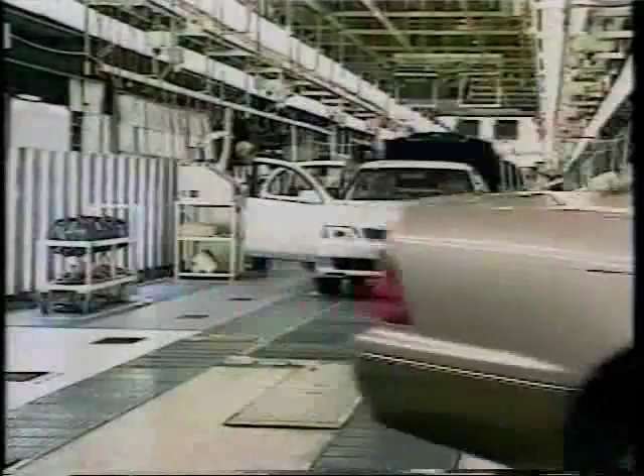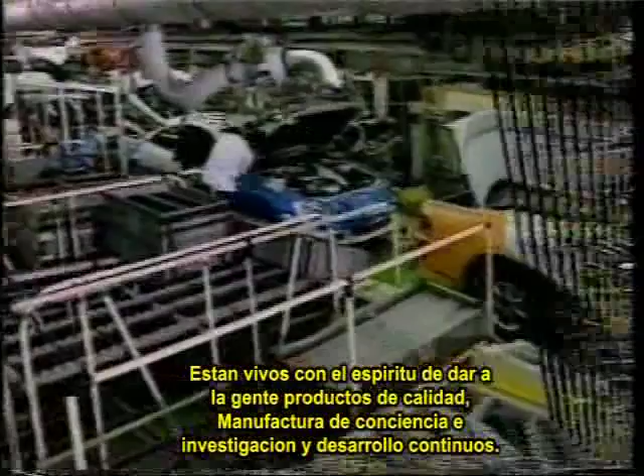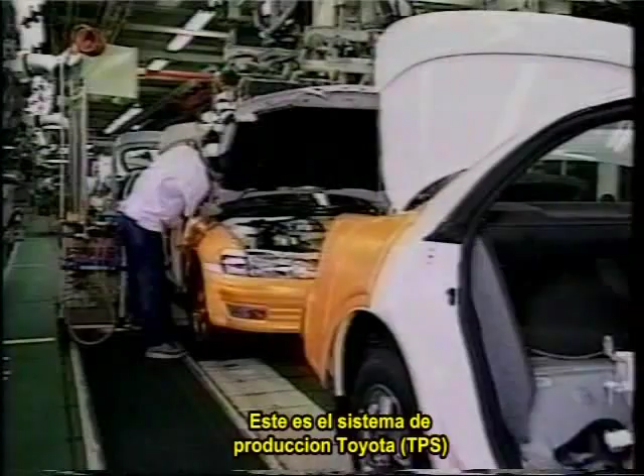Consistently crafted cars roll off the assembly line in a smooth flow. They are alive with the spirit of providing people with quality products through conscientious manufacturing and continuing research and development. This is the Toyota Production System, where manufacturers eliminate waste to provide customers with well-made products in a timely manner.

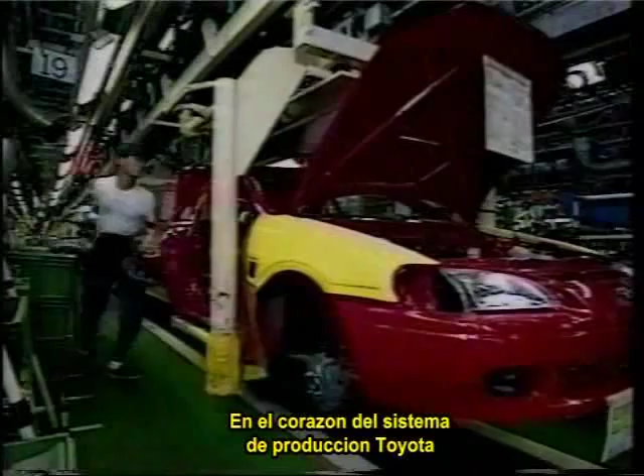At the heart of the Toyota Production System are the concepts of intelligent automation and just-in-time manufacturing. Let's explore the history of that system, which has transformed manufacturing around the world. The concept of intelligent automation, called jidoka, originated in looms invented by Sakichi Toyoda, the founder of the Toyota Group.

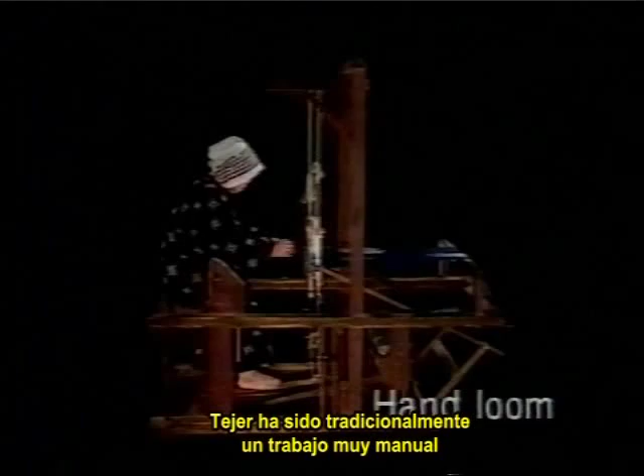Weaving traditionally had been a very manual kind of work. The weaver fed the horizontal yarn back and forth between the vertical yarns. Sakichi had watched his mother working at a manual loom and thought of ways to make weaving easier.

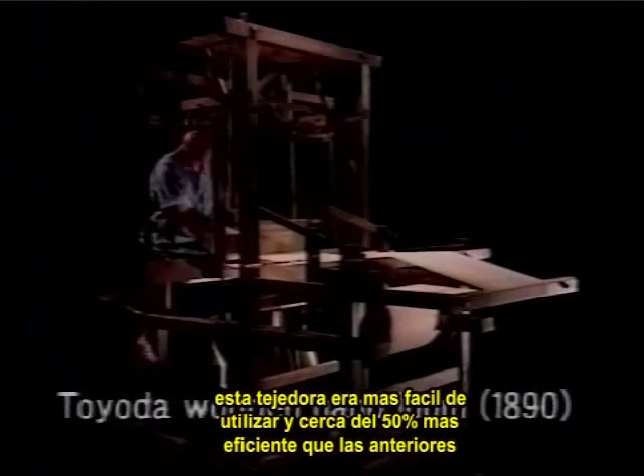He invented an original wooden hand loom in 1890. His loom was easy to use and nearly 50% more efficient than previous looms. The operator could move the yarn guide back and forth with one hand and feed in the horizontal yarn simultaneously. Sakichi then went to work on power looms. In 1896, he created Japan's first power loom, and he continued making one improvement after another.

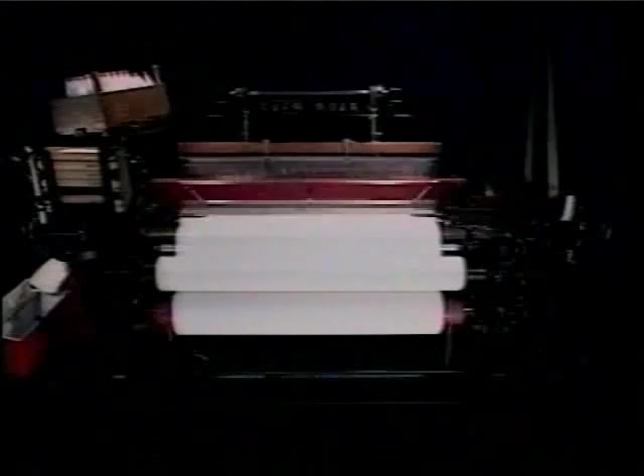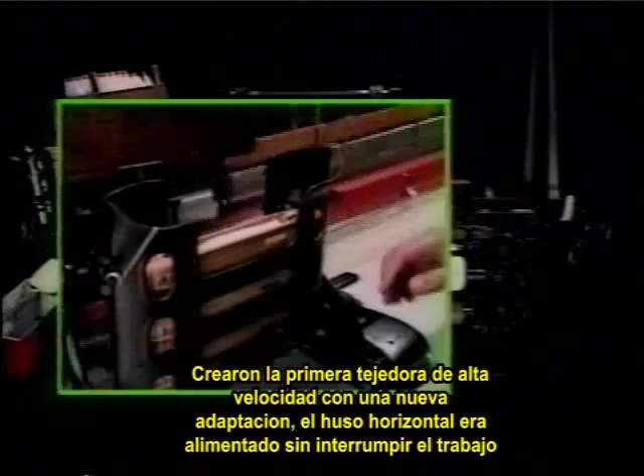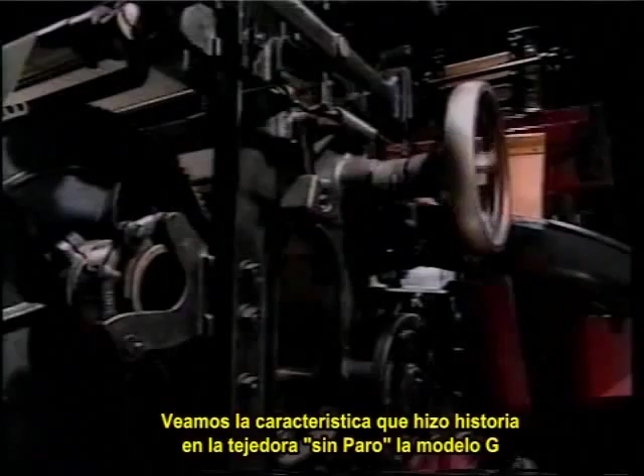In 1924, Sakichi and his son Kiichiro achieved a historic breakthrough. They created the world's first high-speed loom that fed in new weft, the horizontal yarn, reliably without interrupting work. Let's take a look at a feature of their breakthrough non-stop loom, the Model G. Traditional looms wasted material on fabric like this when one of the vertical warp yarns snapped, as often happens.

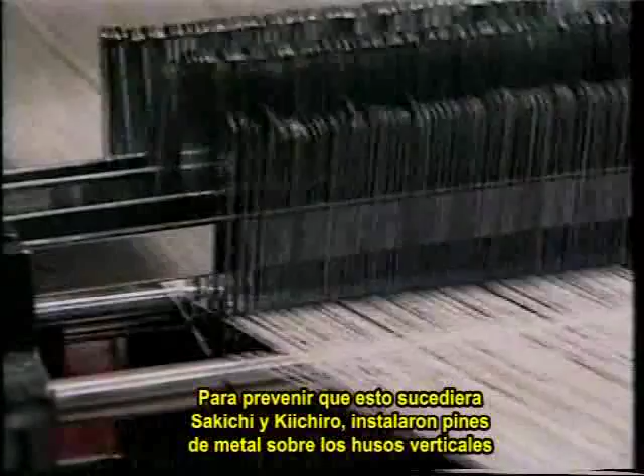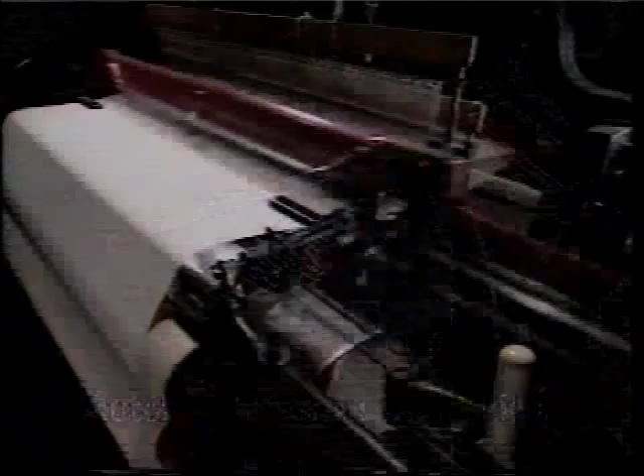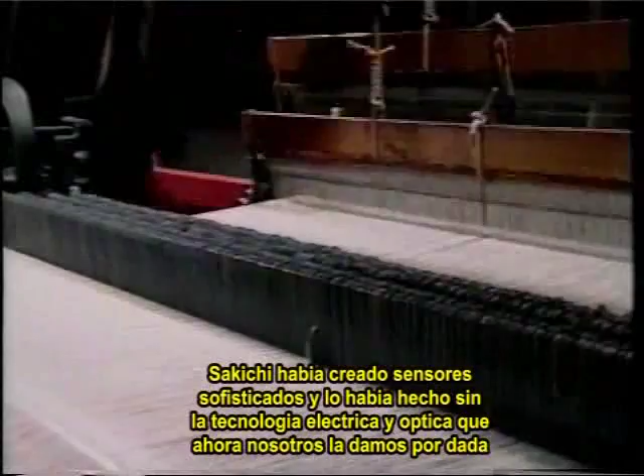To prevent that waste, Sakichi and Kiichiro arranged thin metal floaters over the vertical yarns. A floater would slip down and stop the loom if its yarn snapped. These automatic stop innovations for preventing waste were absolutely remarkable. Sakichi had created sophisticated sensors, and he had done that without the benefit of the electrical and optical technology we now take for granted.

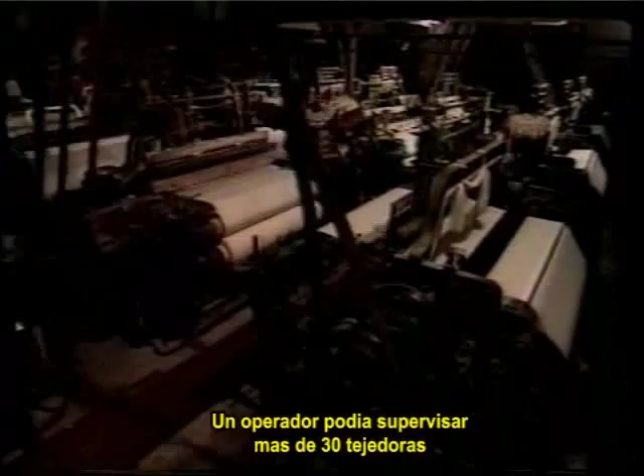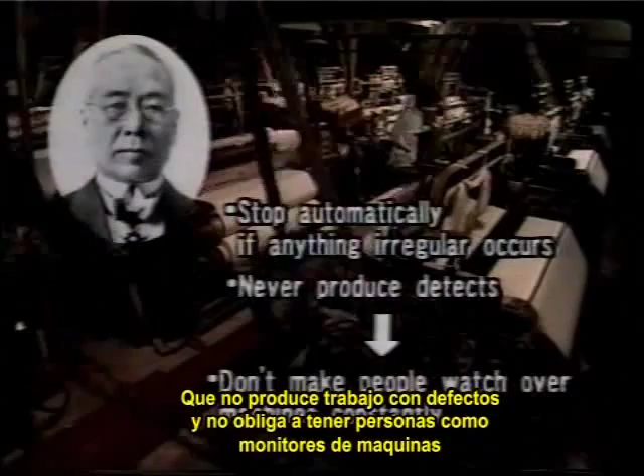His innovations eliminated the need for an operator to watch over each loom continuously. One operator could oversee more than 30 looms. The Model G captured a great deal of attention in Europe and the United States. So Sakichi's advances resulted in machines that would stop automatically if problems occurred, that would not produce defective work, and did not oblige people to serve as monitors.

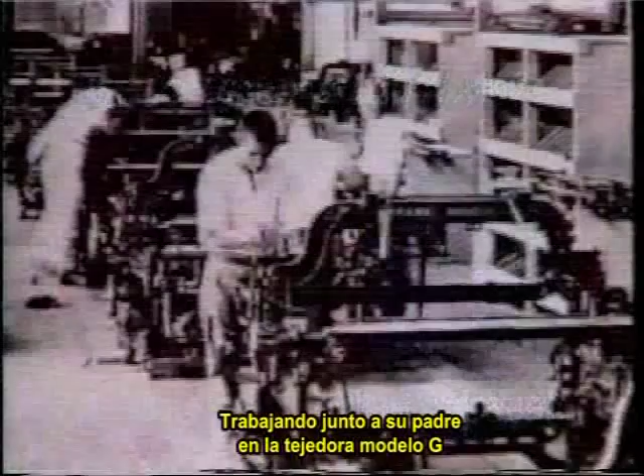The other core concept in the Toyota Production System is just-in-time manufacturing. This concept originated in the ideas of Sakichi's son Kiichiro, who led Toyota into automobile manufacturing. Along with working with his father on the Model G loom, Kiichiro helped put in place a mass production system. He established Toyota Automatic Loom Works in 1926 and introduced American assembly line methods to produce the Model G loom.

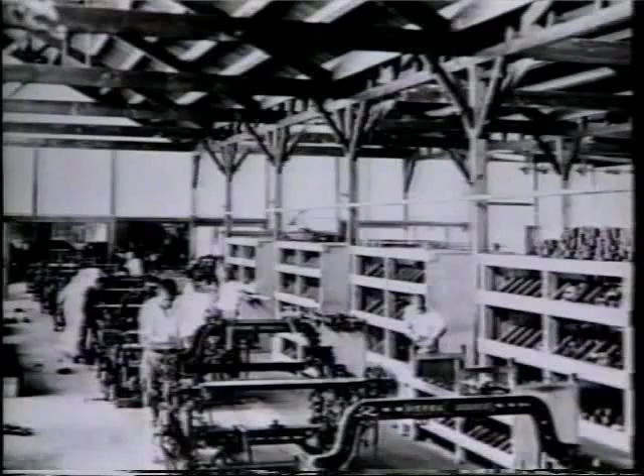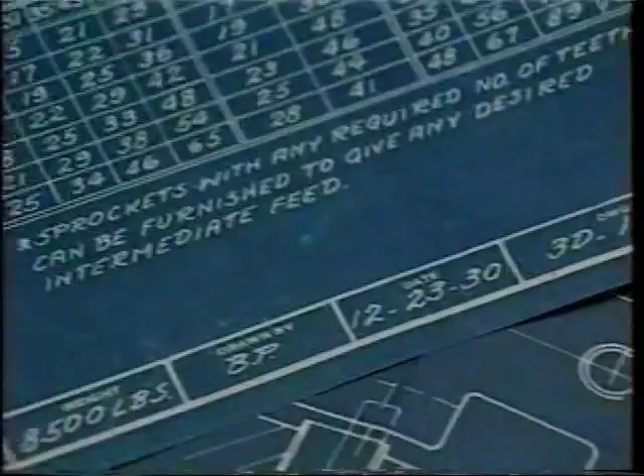Kiichiro traveled to Europe and North America in 1929 to find licensees for his company's automatic loom technology. He was amazed at all the vehicles and roads in the United States and he resolved to begin developing automobiles. People tried to dissuade Kiichiro. They said that Japan didn't have either the technology or the economic foundation for a viable car industry. But he ignored their doubts and set up a shop in a loom factory to develop small engines. He undertook the risk of investing in expensive precision equipment.

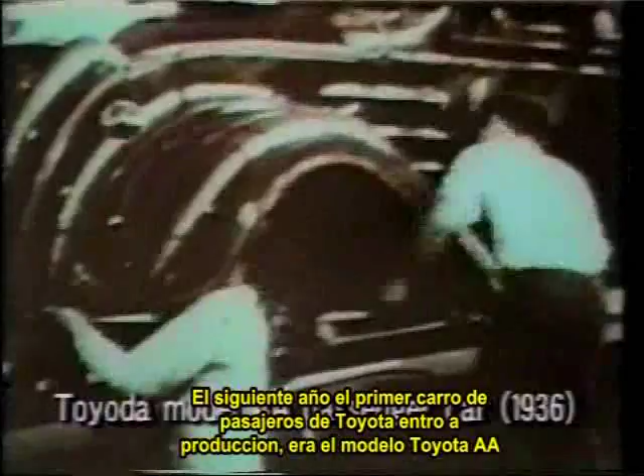In 1935, his team created a passenger car prototype, the Toyota Model A1. In the following year, the first Toyota passenger car went into production as the Toyota Model AA. Kiichiro incorporated his automobile operations in 1937 and began work on a vehicle plant. He refined American mass production methods for his plant and developed the beginnings of just-in-time manufacturing.

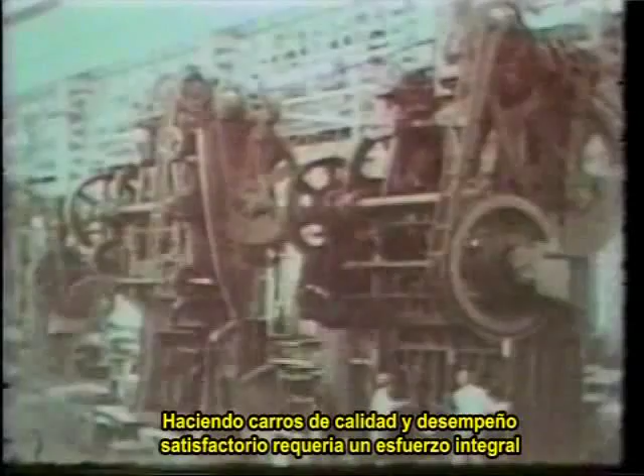The idea was to eliminate waste by making only what was needed, only when it was needed, and only in the amount needed. Making quality cars of satisfactory performance required an all-out effort. And Kiichiro was moving to refine just-in-time manufacturing further, but the outbreak of World War II in 1941 interrupted his efforts.

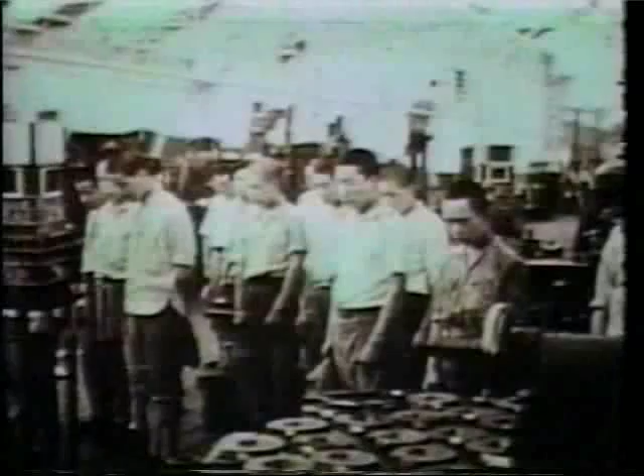After the war, Kiichiro passed on his dream to his cousin Eiji. He instructed Eiji to bring the company up to U.S. standards of technology within 3 years. That was a daunting task.

U.S. productivity in automobile manufacturing was 8 times higher than Japan's, and Toyota was short of equipment and capital. So raising productivity was a pressing issue. Eiji assigned a machine shop manager by the name of Taiichi Ohno to develop a more efficient production system.

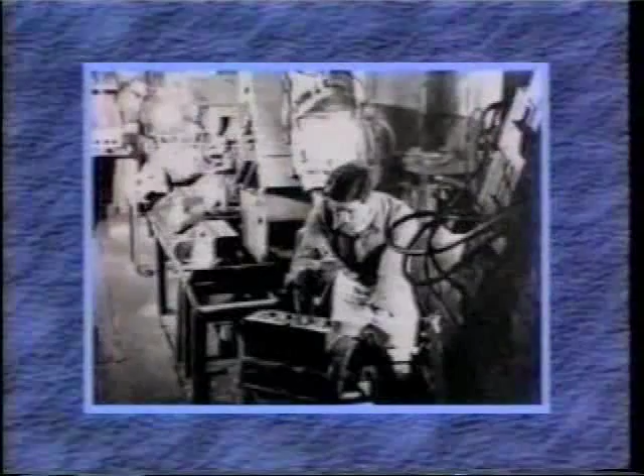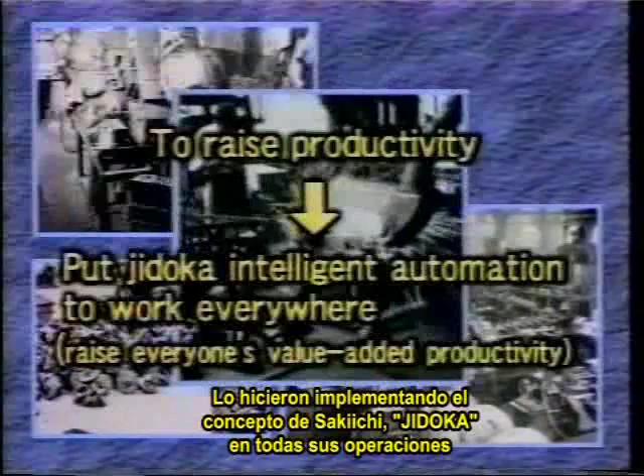The two men looked for ways to raise the value-added productivity of every worker. They did that by putting Sakichi's Jidoka concept to work throughout their operations. They also looked for other ways to stretch their limited resources of equipment and capital. They did that by putting Kiichiro's just-in-time concept to work systematically.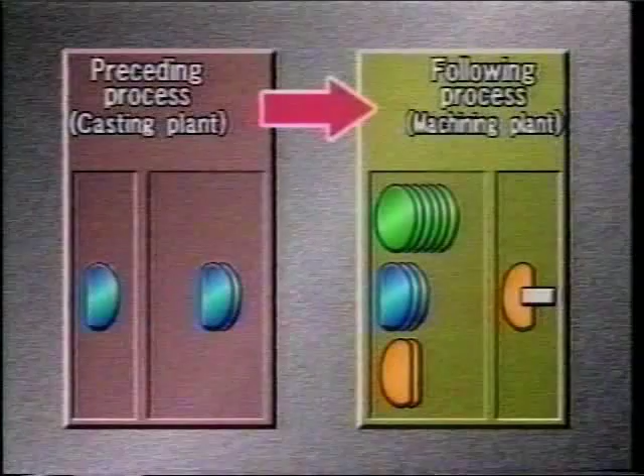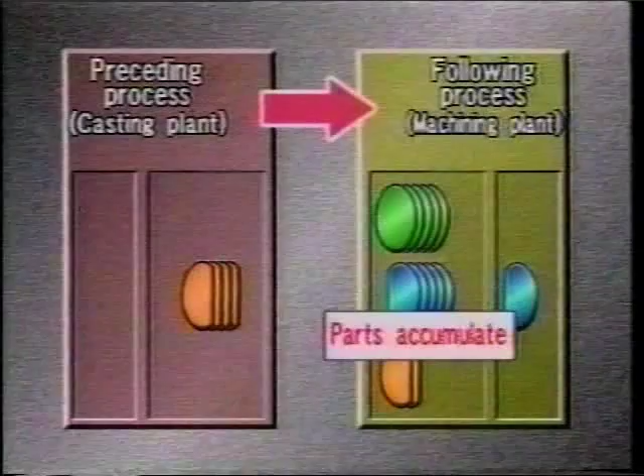Ohno took a cue from the U.S. supermarket. He made each process the customer for the preceding process. In traditional manufacturing, processes delivered parts to the following processes regardless of what was actually needed. Ohno devised a completely new kind of system.

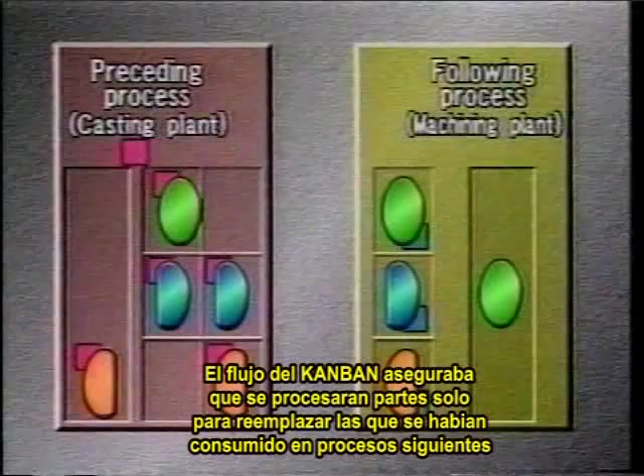Processes used Kanban cards removed from parts they had consumed to withdraw parts from the preceding processes. Kanban on the parts arrayed by processes came off when the following processes withdrew the parts. They became instructions to make additional parts. The Kanban flow ensured that processes made parts only to replace parts actually consumed by the following processes.

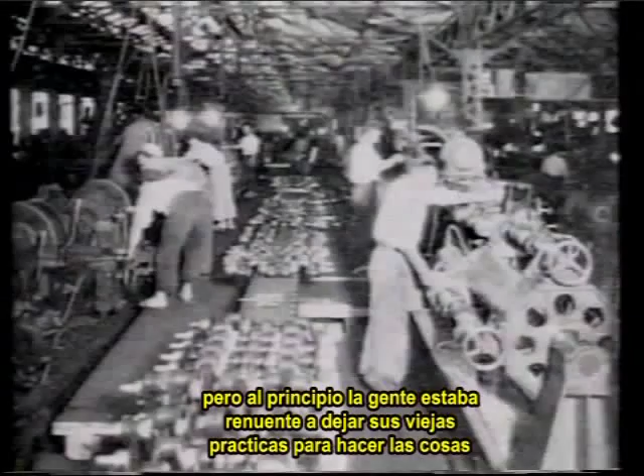Active cooperation by the people in the workplace would be essential to Ohno's system. But at first, people were reluctant to give up their old ways of doing things. Ohno took the initiative. He went into the workplace and taught people how to use his system. Eiji Toyota supported Ohno enthusiastically in putting the new production system in place.

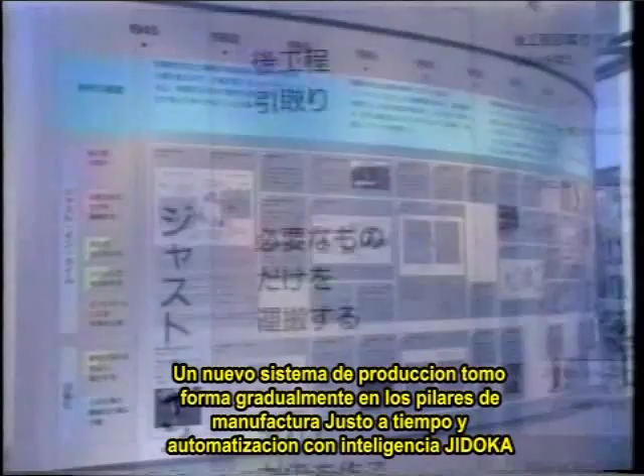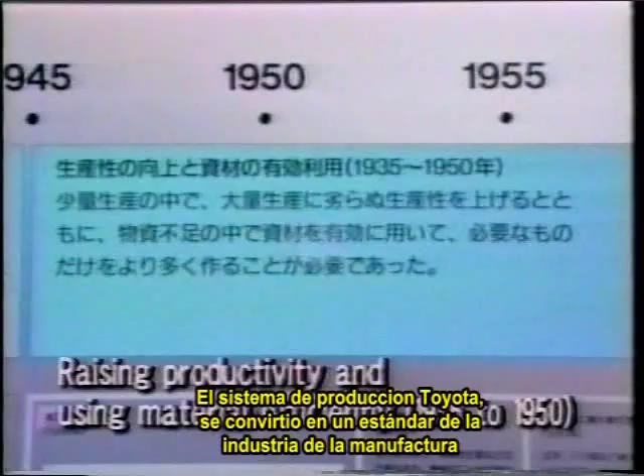A new production system gradually took shape on the foundation of just-in-time manufacturing and Jidoka intelligent automation. As the Toyota production system, it became a standard for manufacturing industries. The Toyota production system gained global attention after the oil crisis of 1973. Toyota recovered more quickly than other automakers from the crisis, and its production system received much of the credit for that resilience.

General Motors Corporation approached Toyota about setting up a joint venture to make small cars in the United States. The two companies set up New United Motor Manufacturing Incorporated in California in 1984. Differences in language and culture presented big challenges, but the spirit of making things well knows no borders. People accepted the Toyota production system, and the Toyota-GM joint venture became the highest-ranked automobile plant in the United States for quality. It became a symbol of successful industrial cooperation between Japan and the United States.

A book published by the Massachusetts Institute of Technology hailed the Toyota production system as the machine that changed the world. Today, the Toyota production system has gained a worldwide following. Let's see how the system now operates in the world's most modern automobile plants.

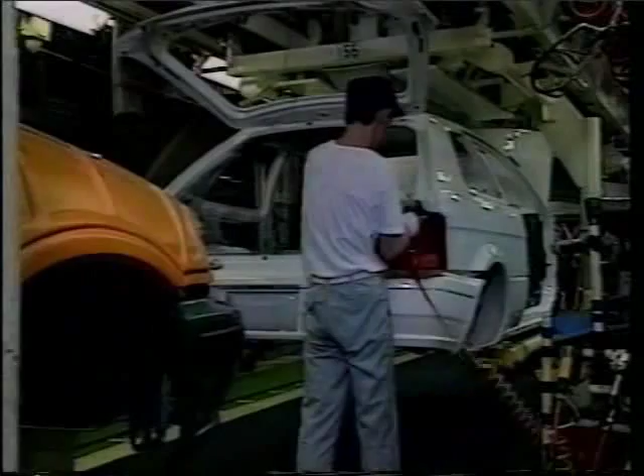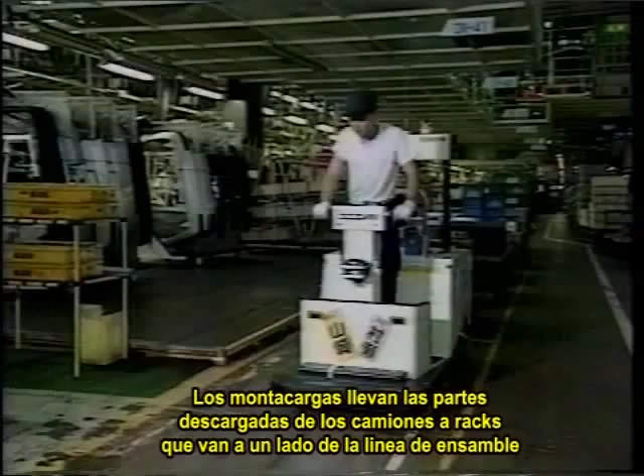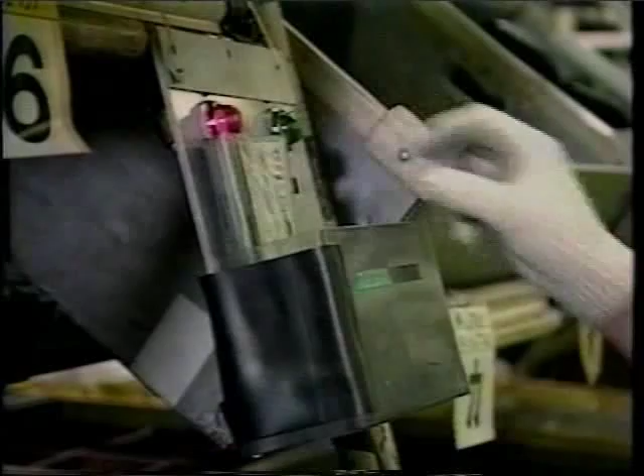The trucks that deliver parts to the plants carry a variety of items in each load. That allows each truck to travel fully loaded, which minimizes trips and thus reduces traffic congestion. Forklifts carry the parts unloaded from the delivery trucks to racks alongside the assembly lines. When people on the assembly line use the parts, they remove the attached Kanban cards. The Kanban get picked up regularly and sorted. The delivery truck drivers pick up the Kanban for their companies before leaving.

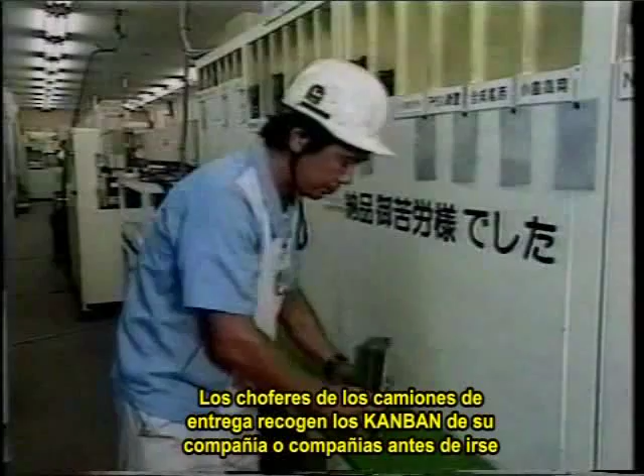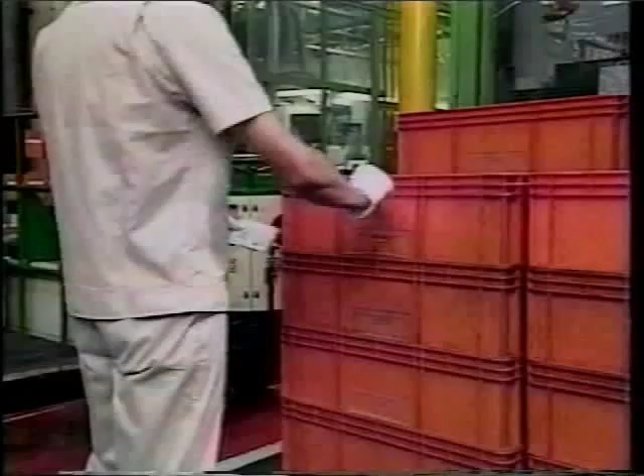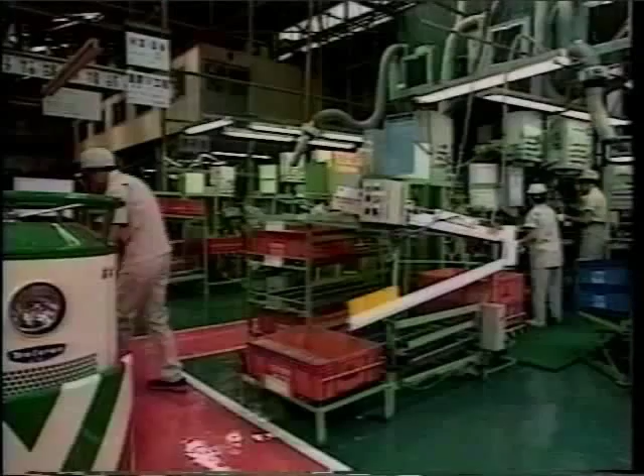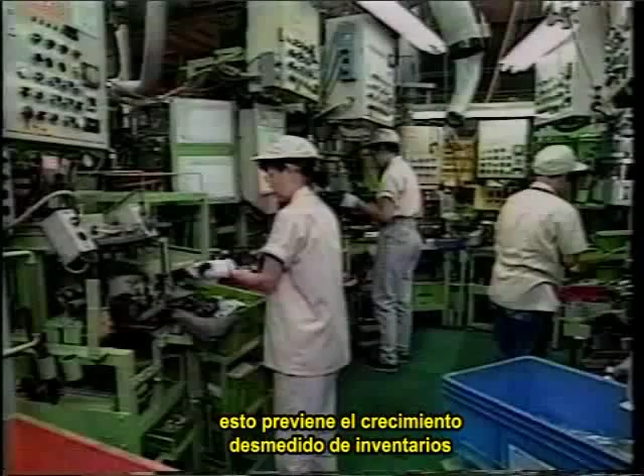Back at the supplier's plant, the Kanban become orders for withdrawing additional parts. Sorting arranges the Kanban according to area in the plant. Shipping personnel exchange the Kanban and empty boxes for full boxes. The production processes in the plant make additional parts only to replace parts that have been withdrawn. That prevents the wasteful buildup of inventories. When the shipping personnel have gathered a full truckload of parts, a truck carries the parts to the vehicle plant.

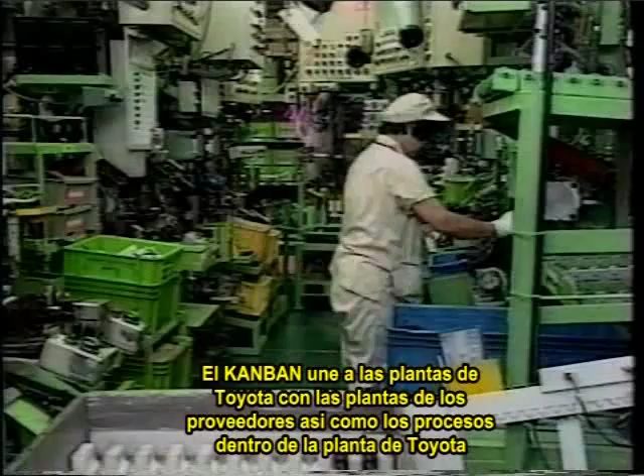Kanban thus link Toyota plants with suppliers' plants, as well as linking the processes inside the Toyota plants. Just-in-time manufacturing minimizes inventories, eliminates waste, and maximizes productivity at all the plants that participate in the Toyota production system. Jidoka intelligent automation also continues to play a big role in the system.

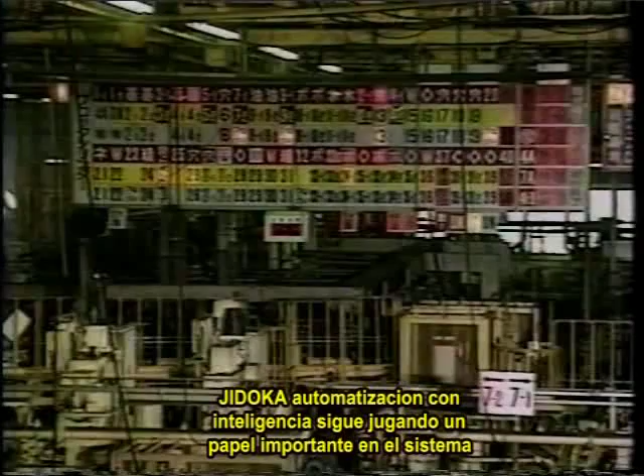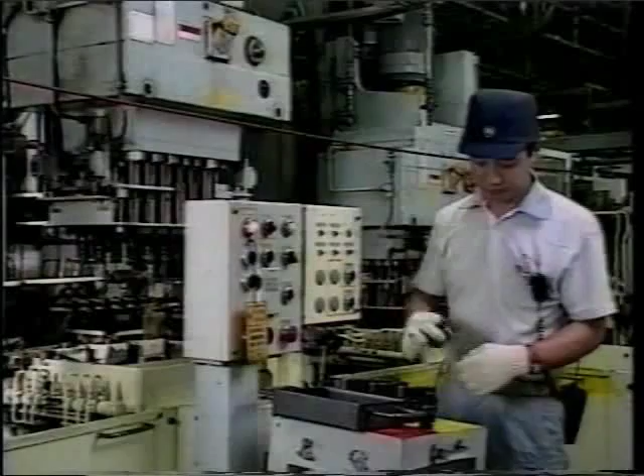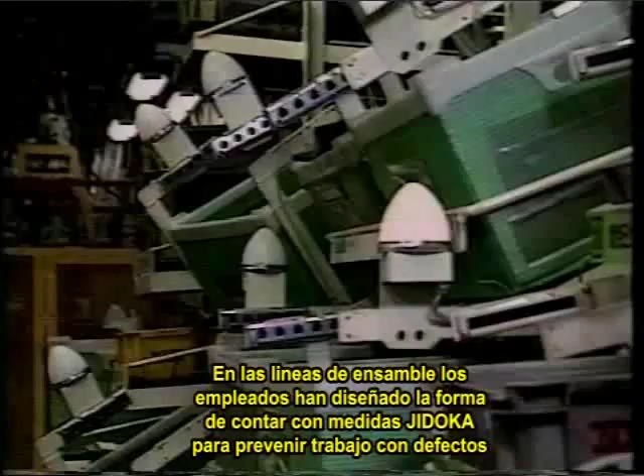On automated machining lines, numbered lamps light up to call attention immediately to any problems detected by sensors. On assembly lines, the employees themselves have devised countless Jidoka measures to prevent defective work, so Sakichi's concept continues to prevent waste. The idea is to build quality assurance into every process, and it works.

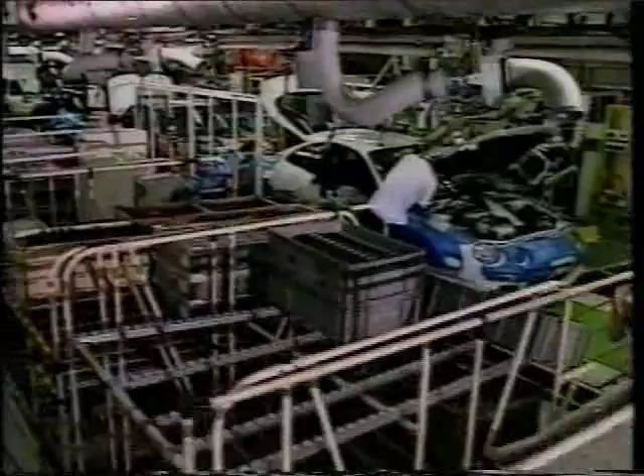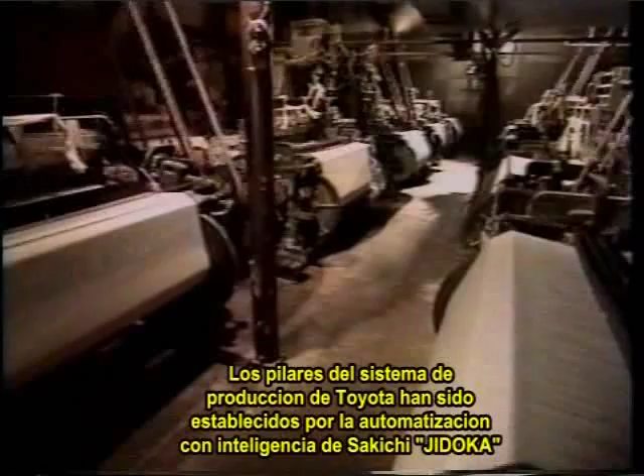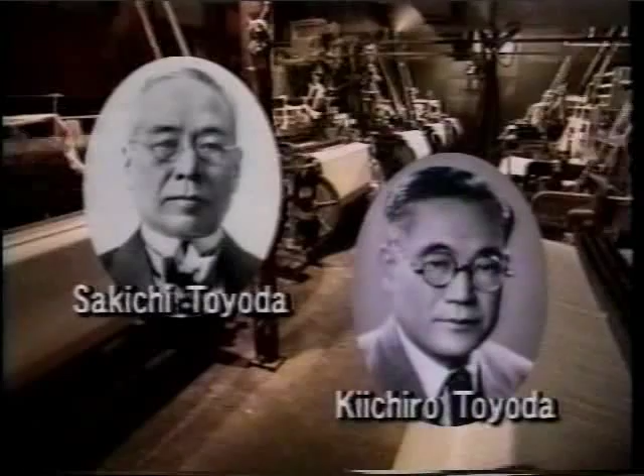The foundation for the Toyota production system has been established by Sakichi's Jidoka intelligent automation and his son Kiichiro's just-in-time manufacturing. Taiichi Ohno and others put those concepts to work systematically with the strong support of Eiji Toyota and his passion for manufacturing.

The Toyota production system continues to evolve in response to changing needs and circumstances, but the fundamental concepts are eternal, including Toyota's commitment to continuing improvement in every phase of products and operations. Those concepts underlie a lasting contribution to enhancing the quality of life for people everywhere.